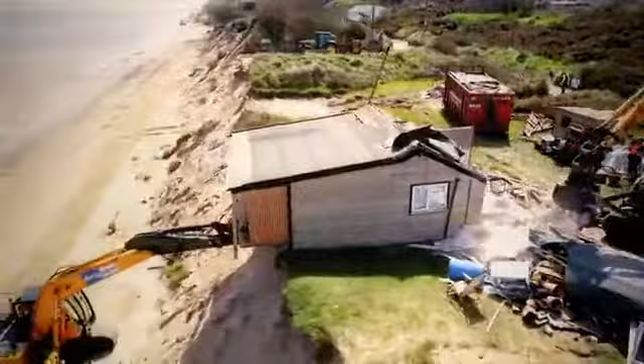With big builds, even the smallest mistake can be a huge disaster. From miscalculations to misunderstandings, these are the engineering catastrophes that only an expert can hope to fix.

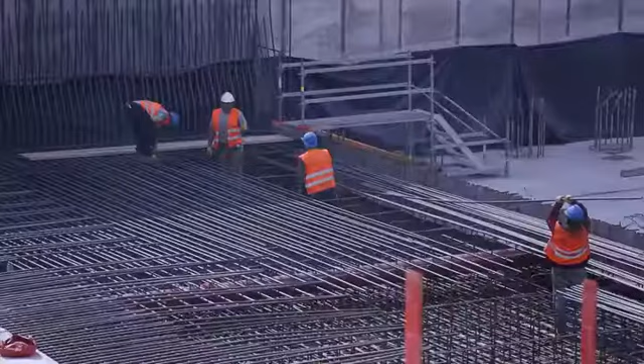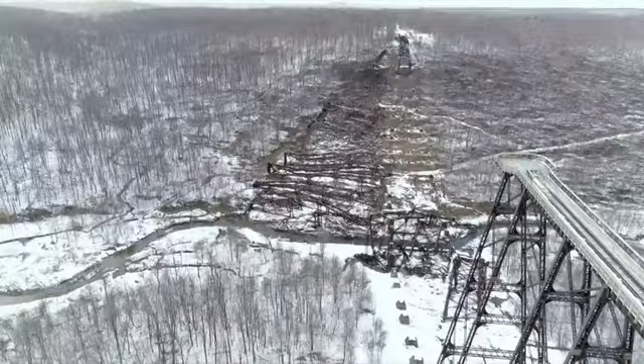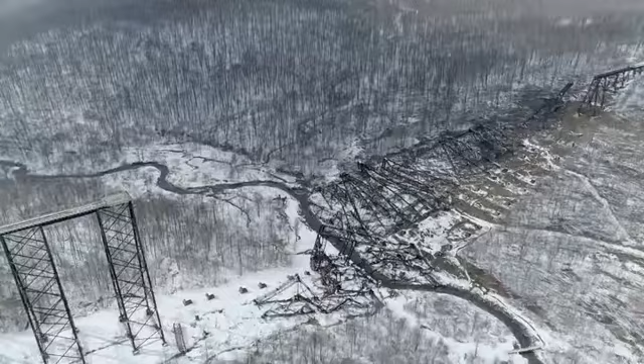When it comes to revolutionary design, sometimes we can learn from the past, other times we can improve on it. But rebuilding on an old foundation can be a huge mistake. For this construction calamity, we head to Pennsylvania, USA, and a famous bridge that fell from grace. This is a massive fail. It's utterly incredible that no one got hurt. If a train was going over it, it doesn't bear thinking about. What was once considered the eighth wonder of the world is now a relic of engineering oversight.

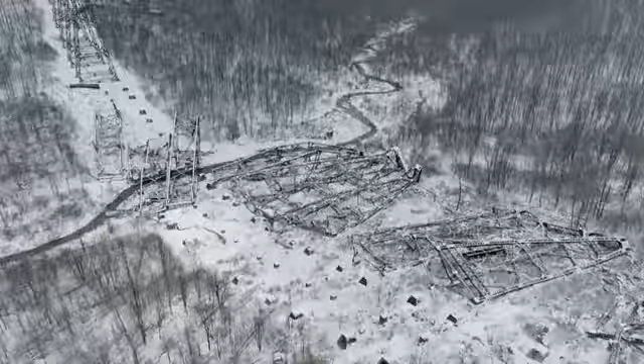The small town of Kinzua, like many other places in Pennsylvania, was central to America's steel production. In the 1880s, demand spiked and trainloads of coal were needed to feed the factories. Railroad engineers faced a giant obstacle, the steep, deep Kinzua Gorge off the foothills of the Appalachian Mountains. The trains had to get through, so they set to work on one of the most ambitious construction projects of the day, the Kinzua Bridge. Completed in 1882, at over 300 feet tall and 2,000 feet long, Kinzua Bridge was the tallest railroad bridge in the world.

At the time, this was pretty much the eighth wonder of the world. It was such an unbelievable achievement. Even with today's technology, this would be a challenge, let alone back in the 1800s. So to actually achieve a viaduct over that size gap was incredible. Jerry Clark from the Bridge Foundation knows what made this build so epic. Other railroads went around the Kinzua Valley. The bridge went across it and used every bit of the engineering technology available during that time.

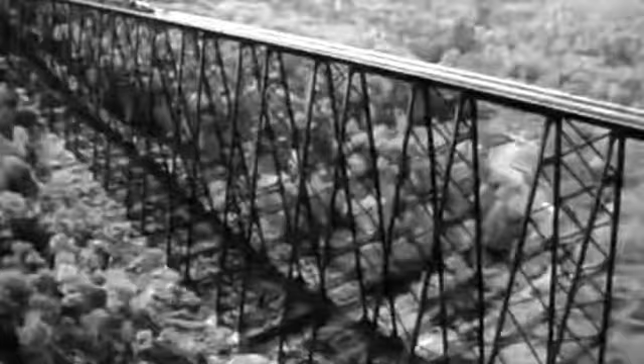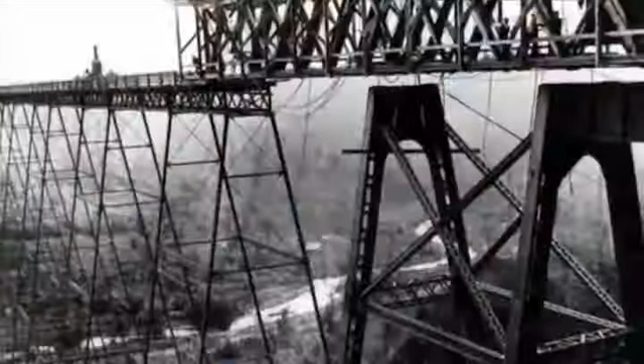To achieve this shorter direct route, the bridge had to be high, long, and capable of supporting heavy coal trains. Engineers ruled out the conventional bridge-making materials, stone and cast iron, instead choosing wrought iron. Building a bridge of this size out of stone or brick would have taken forever, and using cast iron would have been too brittle, so they looked to wrought iron as a suitable material. Wrought iron had another advantage too. It's malleable. So they used sheets of iron to create an innovative support structure known as phoenix columns. These phoenix columns were made out of wrought iron that was folded around and held together with rivets, and this made them stronger and lighter. The revolutionary design was also quicker and cheaper to build.

However, within a decade, locomotives doubled in weight. This meant more strain on the bridge and more vibrations. Vibrations are not a bridge's friend. You expect them up to a point, but here we had a tall, long bridge with trains going over. The trains were getting heavier and heavier. They had to be careful not to push it too far. The material could withstand it to a point, but whatever they did not want that material to crack. To minimize vibrations, trains were forced to cross at just 5 miles an hour. Not the most practical solution in a fast-moving world.

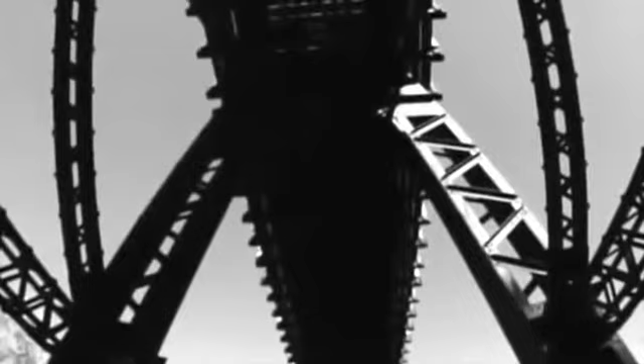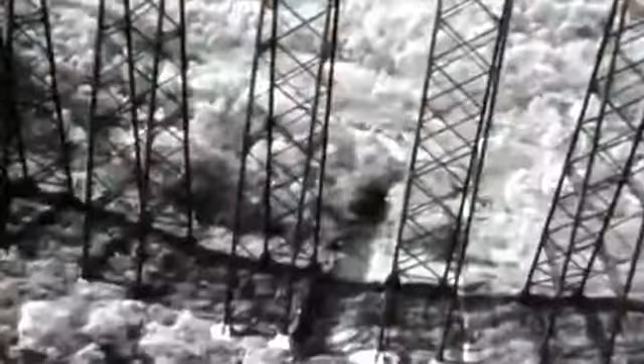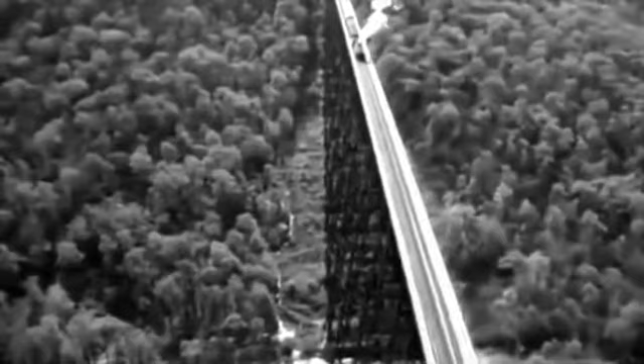Fortunately, an alternative was now readily available: steel. At the time, steel was the strongest, lightest and most flexible bridge-making material around. So it sounds crazy, but they actually ripped the old Kinzua Bridge down and rebuilt it in steel. No bridge meant no coal, so a quick construction was essential. And in just a matter of months, 120 men erected the new bridge. 90 days is all it took to completely rebuild the longest railroad bridge in existence. The new steel bridge used the original trestle design, with large A-frames supporting the pier on top. It could now carry as much coal as the steel mills needed.

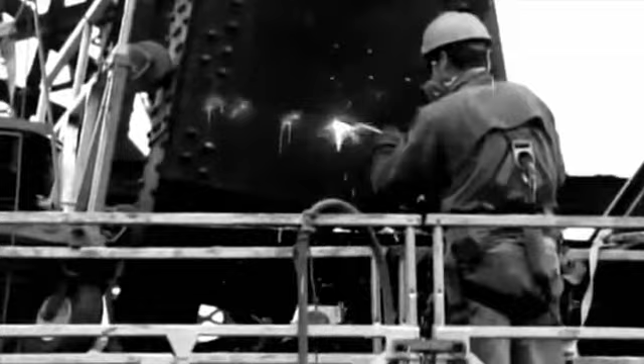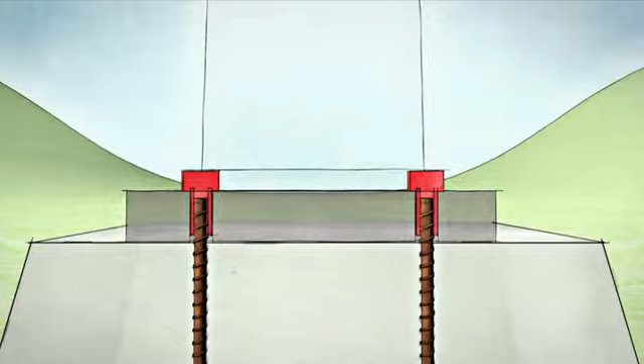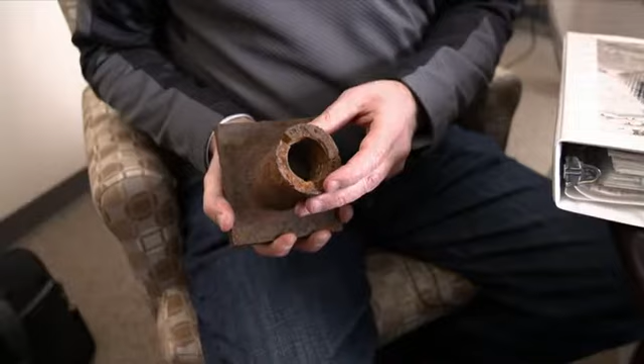But in an effort to save time, a decision was made that would turn out to be disastrous. Rather than installing new steel anchor bolts to hold the bridge in place, the legs were secured to existing bolts. They were too short, so engineers used extending nuts called collars to bridge the gap. So replacing these anchor bolts would have taken forever. You would have needed to dig out, blast away. It would have been a real hassle. So instead, they just put these collars over the top of it. At the time, the collars seemed a reasonable solution, but they hadn't completely factored in Mother Nature.

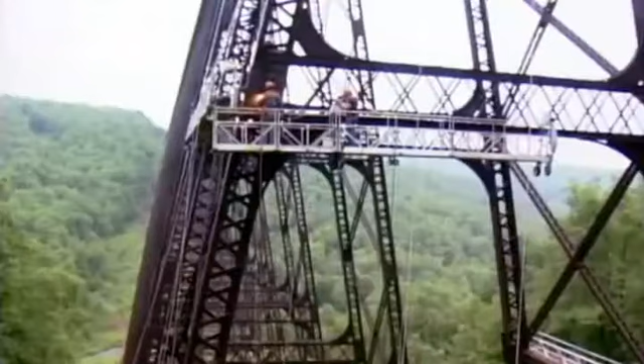This quick fix did the trick, and the bridge carried freight and passenger trains for over a century without incident. In 2002, a maintenance team discovered corrosion on the bridge's legs. They closed the bridge to trains and pedestrians and began repair works. But in the summer of 2003, disaster loomed. An epic tornado spiraled towards the Kinzua Gorge.

In 2003, engineers were repairing corrosion on the Kinzua Bridge in Pennsylvania. But in July, disaster struck when a powerful storm raged up the valley. Structural engineer Brian Emberg was on the restoration team. In July of 2003, I got a phone call, middle of the afternoon, that a tornado had hit the bridge.

I jumped in my vehicle right away, made the trip, and got here right about dusk, and it was clearly a tornado scene, trees everywhere, clouds and mist. I met with the crew and made my way down here to the edge of the ravine, and turned the corner, and the valley just looked filled with smoke like you would expect after a battle.

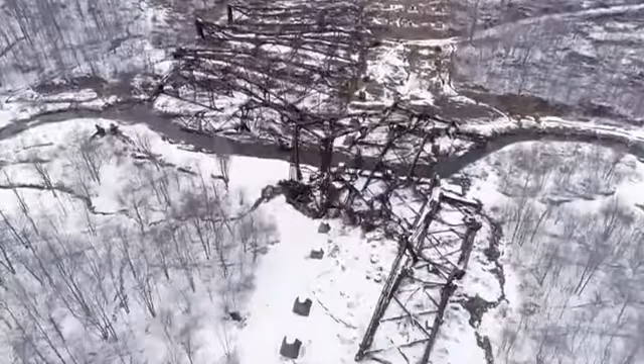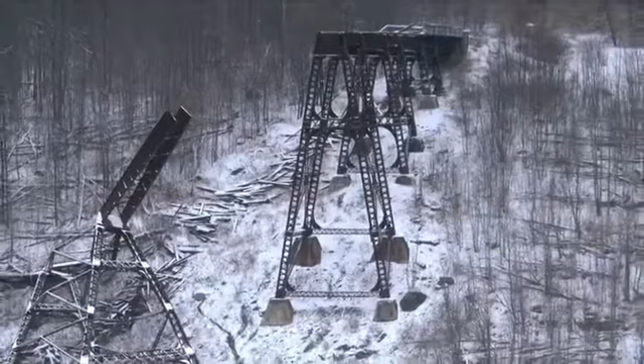You could barely start to make the structure out in the fading light, and you could see pieces of steel emerging from the fog, and then what remained of the structure still standing. It was clear it was a catastrophic failure. The 100-mile-an-hour tornado had sent a huge section of the bridge crashing to the valley floor.

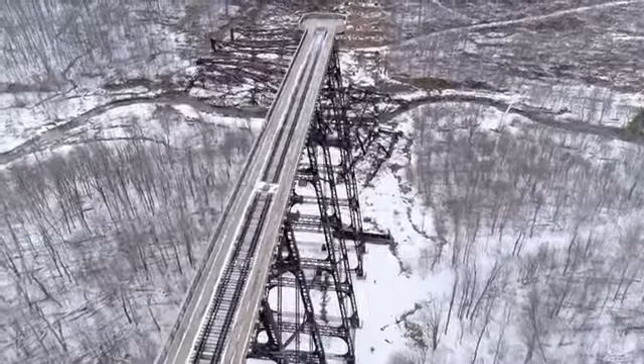This must have been so frustrating. They were on to this problem. They saw it. They were acting on it. So if it struck a few months later, they would have been fine. This is such bad luck. Although devastating to the repair team that spotted the corrosion, closing the bridge had potentially saved hundreds of lives.

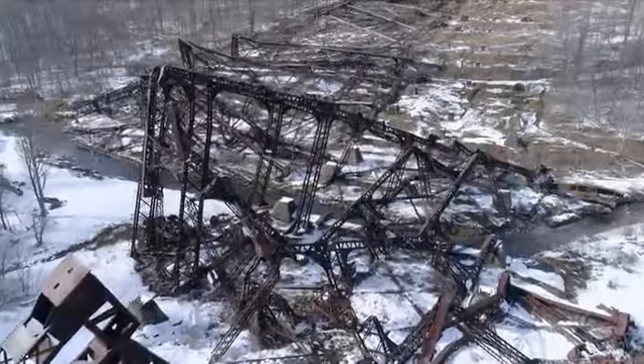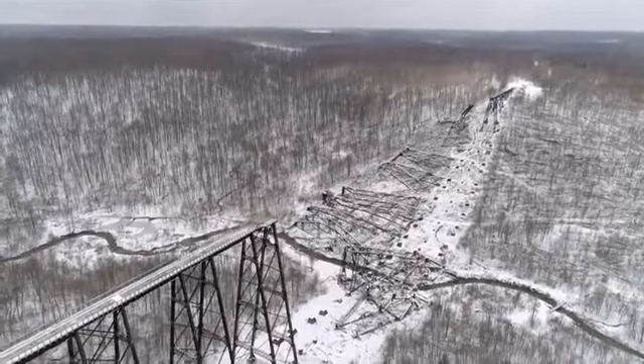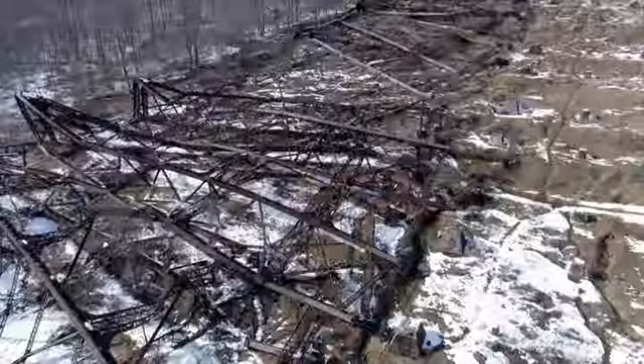To have such a freak of nature storm come in and take it down was really devastating to my crew, my team, and me personally, that we weren't able to get to it and save it in time. Had the tornado arrived a year later, we'd have finished with the repairs and hopefully sustained the structure so it would have survived the storm. The day that it fell down in there, you kind of felt like you lost a family member.

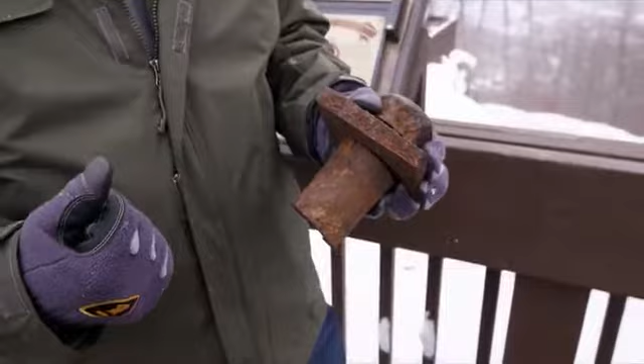Brian and his engineering team suspected the original iron anchor bolts and new steel collars were to blame. And their suspicions were confirmed in the wreckage. So the next morning, I went down to the valley and found these anchor bolts and couplings littering the floor of the valley everywhere, where they had ruptured and failed at almost every single pier.

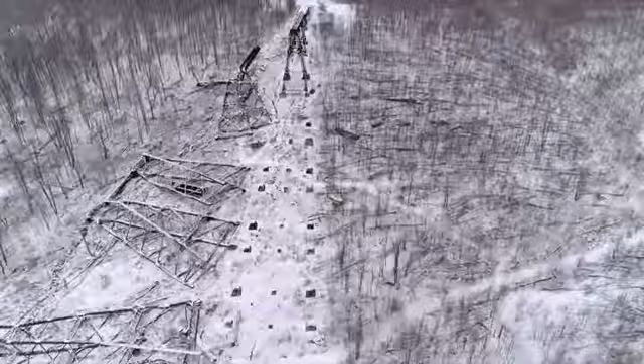Although steel was clearly the stronger and more flexible material, the bridge's iron anchor bolts didn't fail until the tornado of 2003. The problem was that the original designer didn't think there was going to be uplift. And uplift comes from wind blowing on the towers.

When wind blows on the tower, it wants to try and overturn it, and so on this leg, there would be uplift. The original designer used these because he didn't think there would be uplift, when in fact there would be with a 100-mile-an-hour wind. And it turned out to be inferior, especially after years of wear and tear, and it cracked.

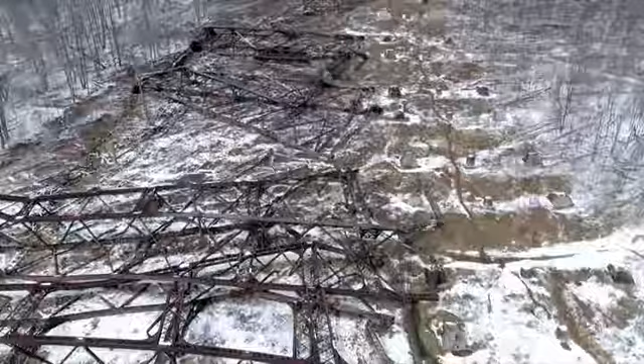A combination of extreme weather and the decision not to replace the anchor bolts over a century ago was the undoing of this epic piece of engineering. This was a hugely ambitious project, and at the time it really pushed the boundaries of engineering knowledge, and it looks like a tiny miscalculation and the use of these collars unfortunately led to the demise of this bridge.

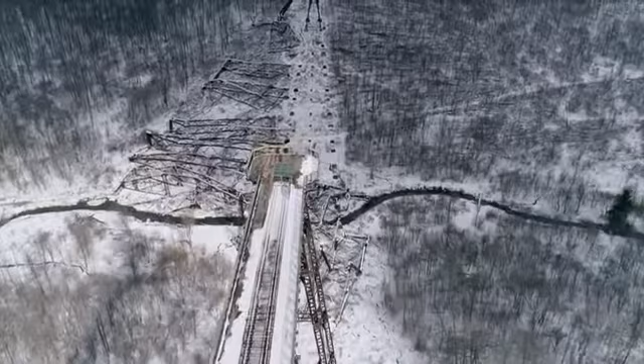Today, around 600 feet of the structure still stands. Rather than tear it down, it was kept as a monument to mankind's ingenuity in engineering. Everything here could have been scrap metal, but there were people that had the foresight to say, this is worth saving. Actually, there are more people that come to the bridge after it was down than when it was up.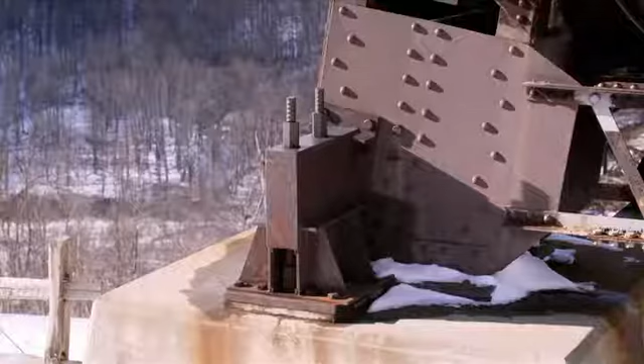To prevent any further collapse, Brian and his team have devised a solution. It's no surprise that it includes steel anchor bolts, an idea that the original engineers overlooked. When it comes to the foundations, you should never cut corners. It may have taken over 100 years, but that lesson was learned in spectacular style.

Next, we head to northern France and a cathedral that's experienced a catalog of catastrophes. This one is a blockbuster of a building blunder. It seems the engineers' zeal to reach the skies clouded their better judgment. This cathedral has been the victim of a combination of tragedy and folly. And when modern-day engineers tried to make a fix, it almost ended in disaster. It's a miracle it's still standing.

Beauvais, a small city in northern France. But there's nothing small about its 800-year-old centerpiece, the gravity-defying Cathedral of Saint-Pierre. So we've got Sagrada Familia, yep, Notre Dame, yep, St. Paul's, but St. Pierre's of Beauvais? Although little known outside of France, the ambition of this cathedral once rivaled any other on Earth.

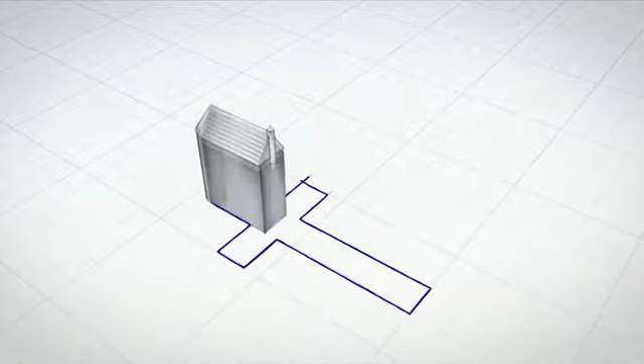Dr. Tom Nixon is an expert in religious architecture. Beauvais Cathedral was begun in the 1220s by an extremely ambitious archbishop, Bishop Milo of Nanteuil, and his vision for this cathedral was really something that would trump all the other major churches in France and the region. Most cathedrals are designed in the shape of a cross, with three main sections: the choir for the clergy, the transept, which forms the arms, and the nave for the congregation.

The nave is often long and grand, but here there was an obstacle. Now, Beauvais could never be particularly long because the site was constricted by the presence of the bishop's palace at the West End. So it could respond to the ambitions of its patrons by being, first of all, very wide, but it could also be very, very tall. And this church, as built, was taller than any Gothic building ever built. And size was very important.

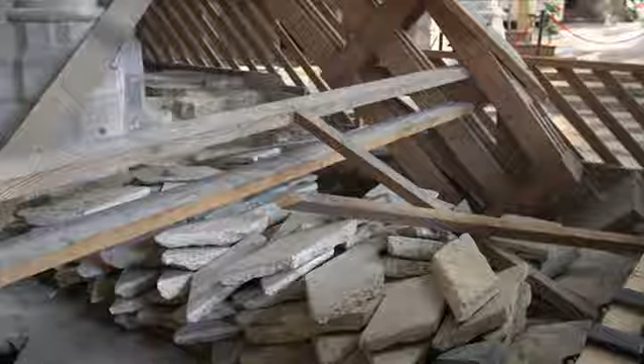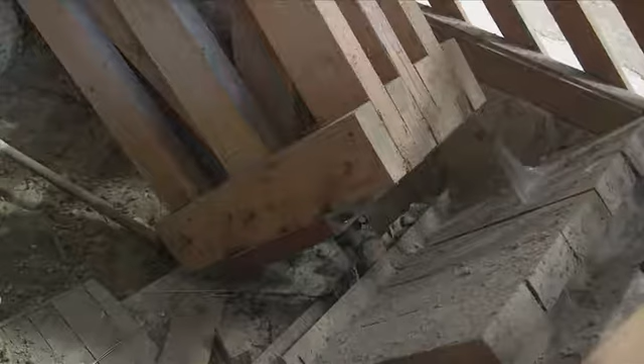With cathedrals, just like stadiums and concert halls, the aim is to have as much space as possible under one roof. But of course, the taller and wider you go, the bigger the engineering challenge. And the greater the chance of making catastrophic mistakes. On close inspection, the grandeur of Saint-Pierre is overshadowed by centuries of repairs that literally hold the building together. And it's all because the original engineers were more focused on height than stability. In fact, their drive for height was so relentless that they had to hold up the tall, unstable walls from the outside.

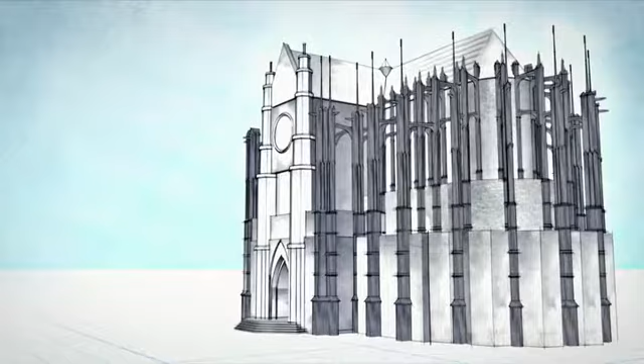So it's really remarkable to be able to come up here to the upper parts of the cathedral. Up here we can really get a sense of the way that this forest of flying buttresses supports the upper levels of the choir. And what's really extraordinary, I think, is many of these piers are still super slender. Flying buttresses act as an exterior skeleton to support the cathedral, but are built to look ornate and elegant, not like mere scaffolding. Engineers hoped these buttresses would be strong enough to prevent collapse.

They're working very hard to ensure that the windows are not obstructed at all, so that we have this wonderful kind of sense of vertical thrust from the cathedral, even though, of course, the reality is the very opposite. What we have is gravity trying to pull this building down. Back in 1284, Saint-Pierre's ongoing battle with gravity came to a head when a fierce storm hit the town of Beauvais. The devastating winds twisted the flying buttresses, forcing them to breaking point. Suddenly, the high vaulted ceiling came crashing down.

Beauvais Cathedral in northern France had ambitions to become the tallest in the world. But in 1284, a storm brought its roof crashing to the ground. The city didn't let that stop progress. The damage was repaired and construction continued. In the 1500s, the cathedral reached dizzying new heights, with the lantern tower soaring over the choir. Jean-Lucien Guénon, one of France's chief architects, explains.

At the time, this was the highest vault in all Christianity at 160 feet high. The lantern tower is built in the Beauvais style, and at nearly 500 feet high, the tallest in the Christian world. The lofty tower was the pride of France, but it had hardly been completed before disaster struck again. This spire was finished in 1570, but cracks appeared straight away, and the whole thing collapsed in 1573 after the Ascension Mass. Fortunately, there were no victims.

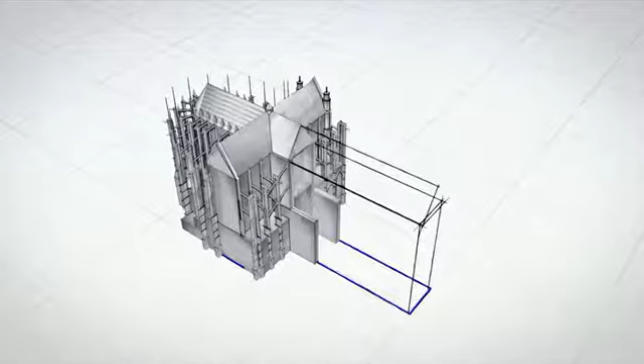Two massive fails before construction was complete wasn't just bad luck. All of the cathedral's problems stem from one major engineering mistake: building too high without enough support from below. In the race to tower over the Amiens Cathedral and Notre Dame, they pushed higher and higher before they had completed the lower floors, which now sounds crazy. Defying centuries of cathedral construction logic, Saint-Pierre's was built with only the start of a key structural element: a nave.

So here we can see the junction of the 10th century cathedral, which originally extended much further to the east, and the new work, the new Gothic church begun in the 1220s, although what we're looking at here is really the transept and the very beginning of the nave, begun in the 16th century. The ancient church didn't provide any support for the massive new cathedral. Leaving the nave unfinished was a fundamental error. The huge weight of the towering walls was pushing them outwards.

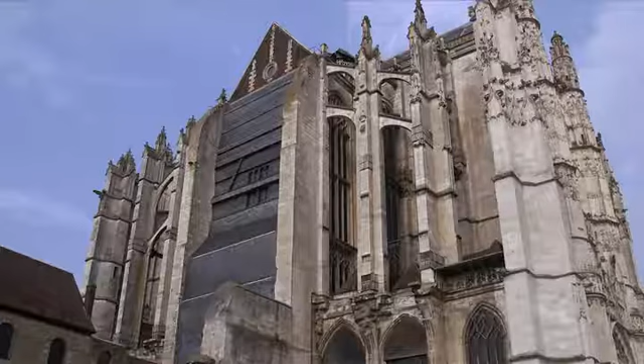They went to all the trouble of digging 10-meter deep foundations, which would have been a huge undertaking, and yet they didn't finish off the nave, which is the essential part to keep the rest of the cathedral standing. Fixing the damage caused by the collapses finally drained cathedral finances, and construction of the nave was put on hold for a few hundred years.

In the 19th century, a few projects wanted to continue building the nave, but it didn't happen. They couldn't find the money. The next works to be carried out were essentially restoration. Although construction remained at a standstill, during the Middle Ages, architects realized the walls were on the brink of collapse. A resourceful fix was needed, and fast.

The builders weren't totally blind. They could see the building was struggling. And to stop it from bowing outwards, they installed iron tie bars. The tie bars literally tied the walls in place, a crude but effective fix that stabilized the cathedral.

Fast forward to the 1960s, and modern-day engineers thought they knew better, with almost catastrophic results. And so it was decided to replace them, but this time not with iron, but with steel tie bars that had less flexibility. And so, whereas the old structure had a certain amount of give and take, it could respond to the winds, the new structure was much more rigid.

By replacing the iron tie bars with steel, a more rigid alternative, the cathedral had lost its flexibility, which left it at the mercy of Mother Nature. So basically, by trying to modernize the fix, the engineers had actually made the cathedral more vulnerable than it had been for centuries.

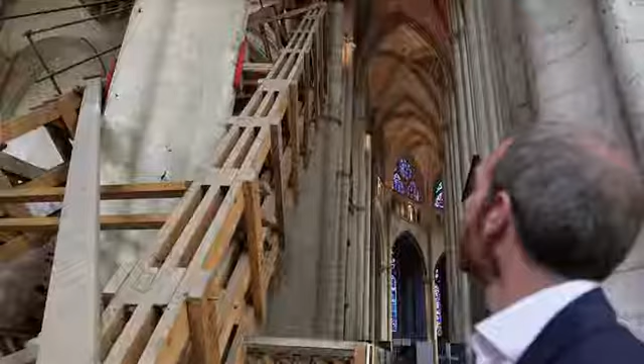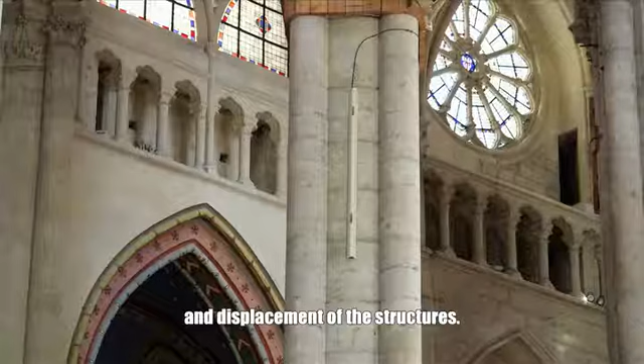With such a fragile piece of architecture, today, engineers keep a watchful eye on any change in the cathedral's stability. Saint-Pierre is closely monitored, using modern technology. Constant Chacoz and his team use highly sensitive sensors to detect the slightest movement. On this pillar, we can see optical strands fixed onto the structure. Optical strands are very accurate sensors dedicated to the measurement of strain and displacement of the structures. The resolution of these sensors is about 1 micron. A micron is 100 times smaller than a hair.

1 micron might seem like a tiny amount, but when you've got thousands of tons of stone shifting around, I'd want to know exactly what was going on. While monitoring for modern-day movement, Guillaume Caron is laser mapping the cathedral in 3D to check for hidden defects in the original construction.

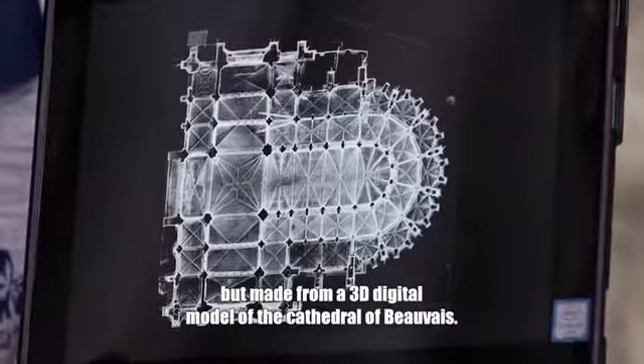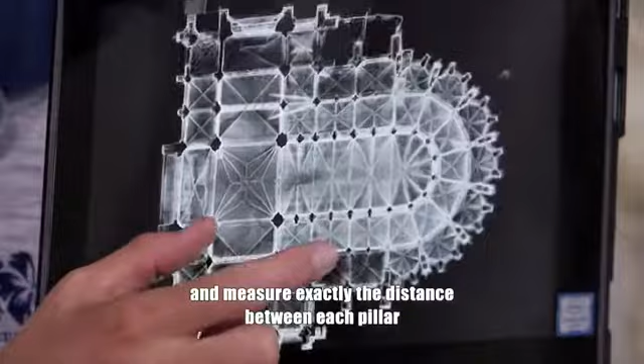This image is a kind of blueprint, but made from a 3D digital model of the Cathedral of Beauvais. And what is interesting from this information is it's not a manual drawing, it's got from measures. So from this blueprint, or digital blueprint, we can highlight some deformations and measure exactly, for instance, the distance between each pillar in the cathedral.

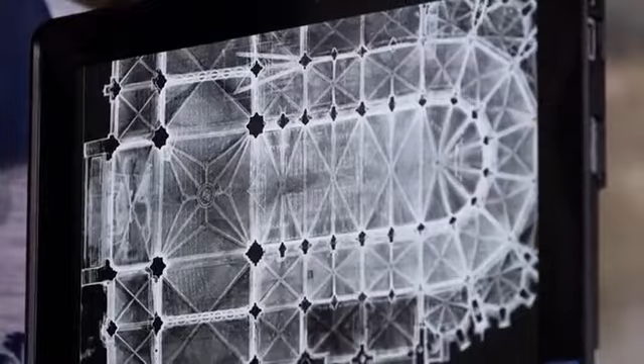Laser scanners bounced high-energy light off every surface in the cathedral, creating a highly detailed picture of the building. It was so detailed, they could see things that weren't visible to the naked eye. What Guillaume's team has discovered is more than a little disturbing. Beauvais Cathedral in France has a history of engineering issues that date back centuries. Today, modern technology is vital to understanding how best to preserve this fragile building.

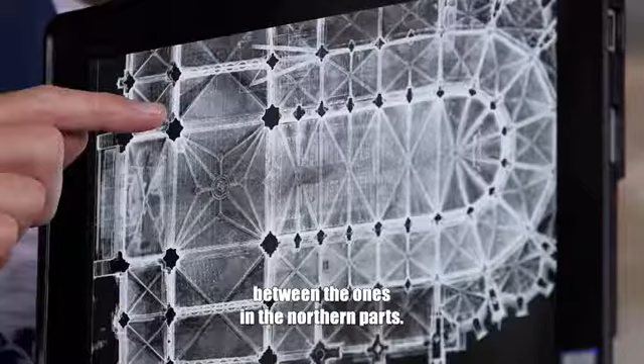Guillaume Caron explains. Using this image, for instance, we are able to highlight that the pillars that are on the southern part of the choir are very nicely aligned, but there are some misalignments between the ones in the northern part. These misalignments have remained undetected throughout the ages, but reveal a whole new instability threat. We were surprised by these deformations and the fact that the building is still not collapsed.

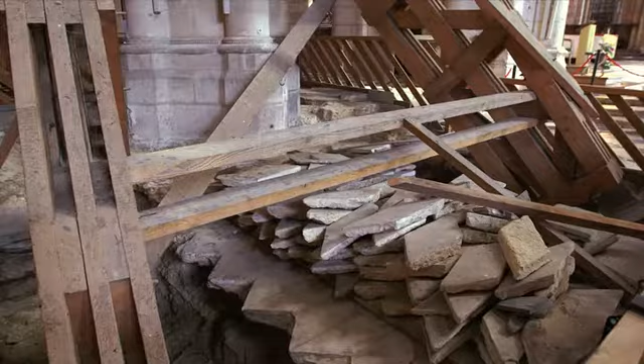To further stabilize the walls, engineers have taken the radical step of installing giant braces. The braces, they're not pretty, but at least the cathedral is still standing. This building is clearly a survivor.

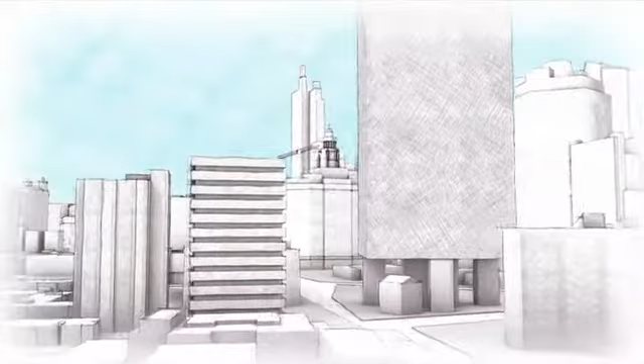Our next story begins in Illinois, where a radical piece of engineering dating from 1900 has inadvertently opened the Great Lakes to invasion. 5 to 10,000 of them just erupting out of the water. I've been struck in the head, one who nailed me right in the thigh. This Army engineering solution is truly shocking.

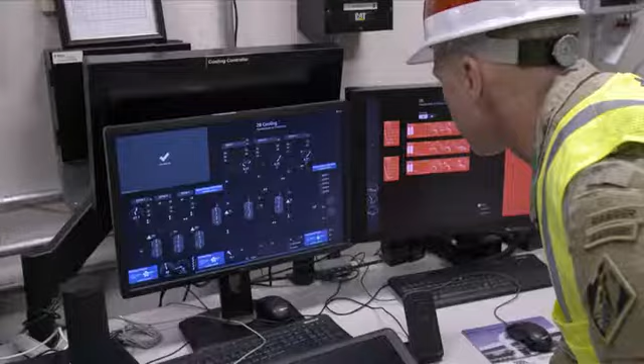Chicago, Illinois. In the 19th century, the Windy City grew from a staging post to one of the most influential places on Earth. Home to hot jazz and deep dish pizza, Chicago is the place to be. And in the summer, there's no place you'd rather be than on the nearby shores of Lake Michigan. Lake Michigan is one of North America's 5 Great Lakes, the largest group of freshwater lakes on the planet.

Jennifer Caddick represents the Alliance for the Great Lakes. The Great Lakes region supports a multi-billion-dollar tourism industry, but there's also a thriving hunting and fishing economy in the Great Lakes region as well. People come from all over the world and all over the states to hunt, fish, and recreate here.

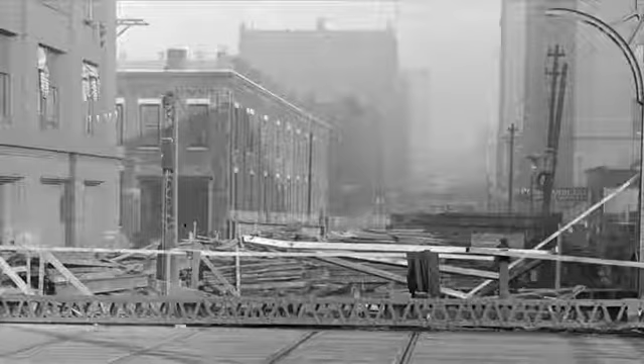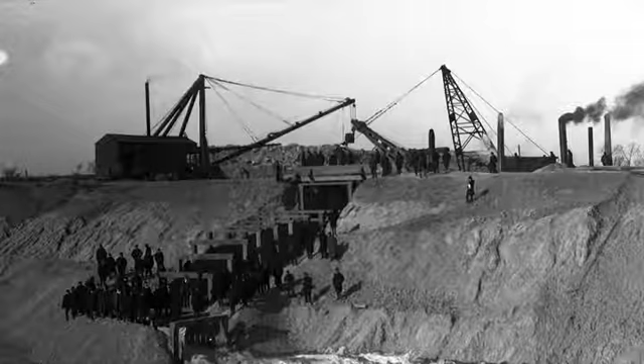By the late 1800s, Chicago's rapid growth posed a problem: more and more sewage. Back in 1900, Chicago had problems that their sewage, all of their waste, were flowing into the Chicago River, and then that was flowing out into Lake Michigan and right towards their drinking water intakes. To stop sewage from contaminating the fresh water of Lake Michigan, engineers came up with an epic idea: to send the city's waste in another direction by reversing the flow of the Chicago River.

Work began on the Chicago Sanitary and Ship Canal, connecting the Chicago River with the Des Plaines River, 28 miles away. The new waterway connected Chicago with the Mississippi Delta and ultimately the Gulf of Mexico, not only solving the sewage problem, but also creating a trade route. However, the ingenious engineers had unknowingly opened up the Great Lakes to a major threat. I'm stating the obvious here, but connecting 2 waterways that have never been joined before sounds like a recipe for disaster. This disaster came in the form of an invasive interloper, the Asian carp.

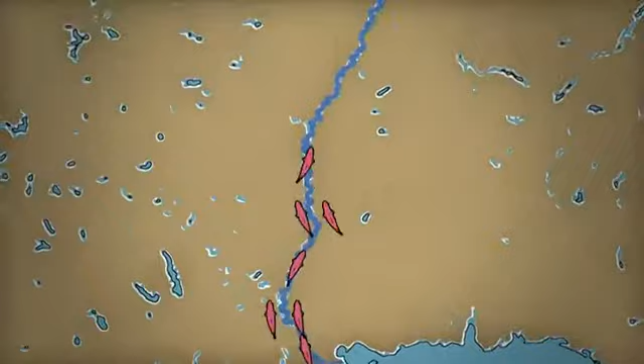Initially, in the 1970s, the Asian carp were brought in intentionally to eat algae in sewer treatment plants. However, they have since escaped via flooding into the surrounding waterways and are now running rampant throughout the Mississippi Delta and right up toward the Great Lakes. Asian carp are a highly invasive species that spawn rapidly. They overwhelm native fish, consuming their food and threatening their very existence. By the 1990s, the carp had spread to the Mississippi Delta. Today, they are within mere miles of Lake Michigan, and they are still on the move.

Asian carp are not only a threat to native fish, but they can also be potentially lethal to humans. They weigh up to 99 pounds, and when startled, they can leap out of the water unexpectedly. With a tourism and leisure industry worth billions of dollars a year, the last thing the Great Lakes need is Asian carp.

To stop the subaqua menace in its tracks, an engineering solution is in place at Romeoville, 30 miles southwest of Chicago. It's an underwater electric fish barrier, operated by the U.S. Army Corps of Engineers. Colonel Reisinger is in charge. We are standing on top of Barrier 2 Alpha. Each barrier unit generates an electrical field reaching across the canal.

As the fish moves from downstream to upstream, they run perpendicular to that electric field generated. When that fish hits that narrow array field, our intent is to create enough voltage potential there that the fish decides it's uncomfortable enough that it just turns around and goes back down river. Romeoville actually has 3 separate electric barriers at intervals along the canal, in the hope that if a carp gets through one, it will be stopped by the next.

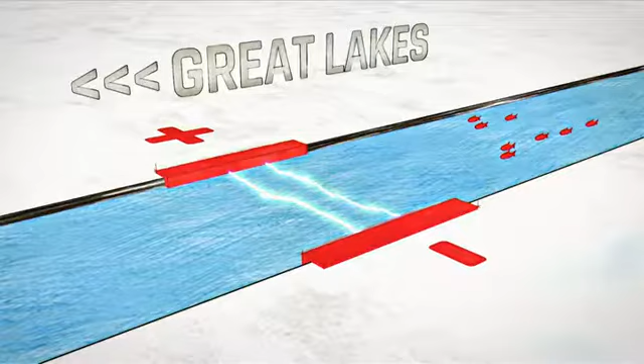The electric fish barriers appeared to be a solid solution. However, recent studies suggest that this piece of engineering isn't watertight. Tests have shown that 62% of fish could get through. The jury's out on this system. It's costing millions of dollars a year, and it might not even work. If the electric field is undisturbed, it's hard for any fish to get through. However, when a big metal boat goes through that field, it breaks up the field, and fish can slide in the bow wake. Also, if fish are in big groups, the outer fish disturb the electric field and the inner ones can slip through.

With invasive fish potentially slipping through the barrier, regular patrols downstream monitor and head off the problem. Expert fish hunter Justin Peterson has his sights set on carp. Today we're looking for small Asian carp. This past summer, we caught a silver carp in a marina that was 5 miles from Lake Michigan. Carp are extremely dangerous. They'll jump into the boat. I've been struck in the head. I had a big bruise on my thigh once from one who nailed me right in the thigh.

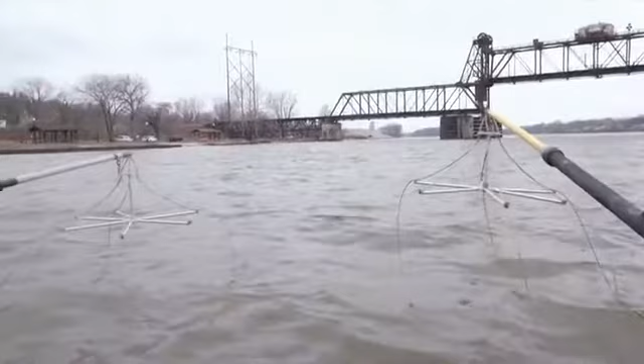Justin's methods are just as shocking as the barriers. Fish get stunned by the electricity. We net them, put them in this tub. Every Asian carp that we catch is weighed and measured. It's a war on carp. I mean, we're at the front lines here, trying to beat them back, and they're trying to keep going forward. At one point, we hit the electricity, and we saw them in the range of 5,000 to 10,000 of them just erupting out of the water.

When you're at war, it's important to know your fishy friend from your fishy foe. This guy here, that's a gizzard shad, quillback, smallmouth buffalo. And this guy here is a silver carp.

All these fish, they're stunned. Within 5 minutes or so, they'll be back to normal, and we'll release them back into the water. Minus the Asian carp, we don't release those ones.

Back in Romeoville, U.S. Army engineers are constructing a fourth barrier in an attempt to strengthen their defenses. Fourth barrier? That tells you all you need to know about the effectiveness of the other three. Some people would say that building the fourth barrier is a waste of money because you're just pushing the problem along.

With the U.S. Army Corps of Engineers desperately trying to stop the advancing fish, experts are looking into other possible solutions. But to truly protect America's Great Lakes, they may have to turn back time. Romeoville, Illinois. The U.S. Army are locked in a conflict with the advancing Asian carp. However, their underwater electric barrier is flawed. Perhaps there is only one real engineering solution that will work.

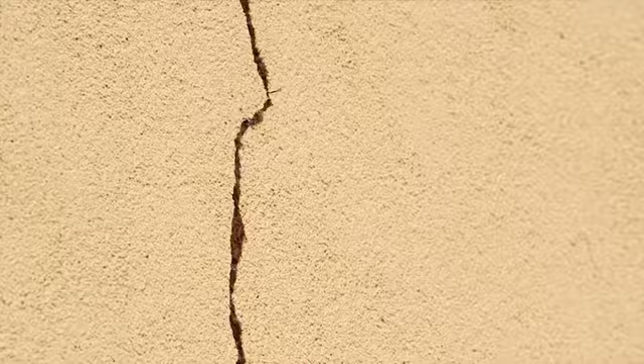What you see here is one of the, I would say, main affected buildings in Staufen. It's right on the Marktplatz, right on the market square. It's an earthquake in slow motion. This is what they say here. The ancient Baroque town hall was worst affected, sinking by 1/3 of an inch. 1/3 of an inch might not sound much, but if your building hasn't moved for 500 years, that's a huge amount. After just 2 weeks, a staggering 68 buildings were showing signs of damage.

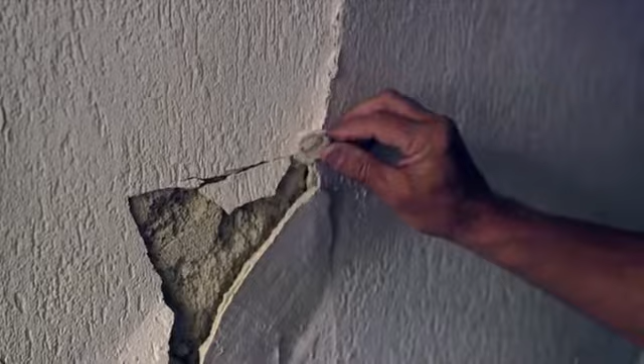And for pharmacist Peter Gasper, there was no cure in sight for this perplexing problem. We detected some cracks in the walls, and nobody was certain what was the reason or the cause of these cracks. Some people got emotional, some people thought about a catastrophe, and so everybody was worried. If you walk through the house, you can find cracks all over the house.

Anxious residents called in geologists who discovered something extraordinary. Staufen hadn't been sinking, but bizarrely, the ground under the town had now begun to rise. The team quickly zeroed in on the culprit, a project to heat Staufen's town hall with a green energy source.

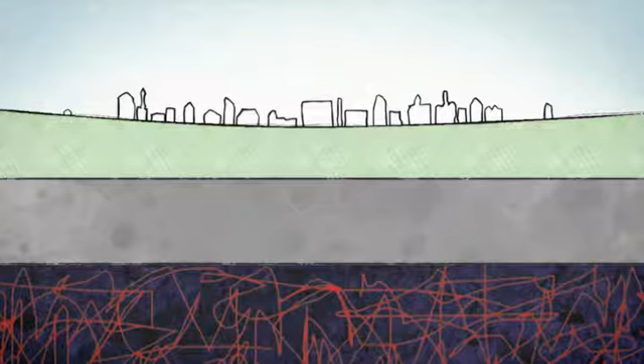The Earth's core is extremely hot and full of geothermal energy. To harness this geothermal energy, you need to drill down straight into the Earth's crust. This heat energy is then drawn up the borehole to the surface, where it powers heating and cooling systems. Drilling began in 2007, just before the town started to crack.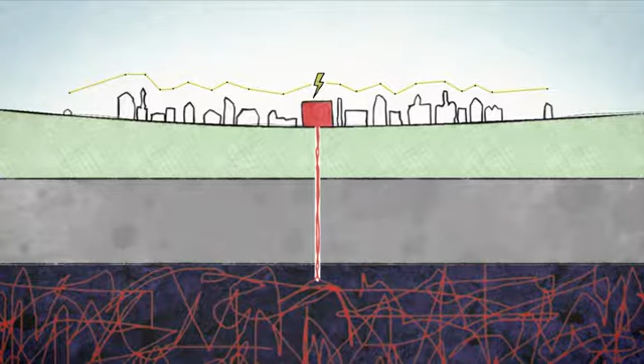When I heard about the idea, when they wanted to repair the building, that they want to use geothermal energy to heat and cool the house, I said, what a good idea. And the town council unanimously said, what a good idea.

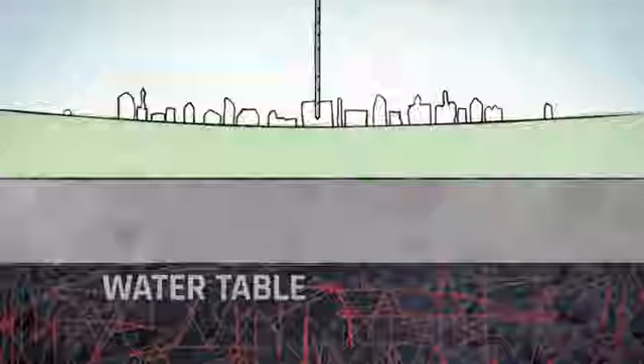Free energy might sound like good news, but to reach the heat, engineers unintentionally triggered a slow-motion earthquake. To tap into this geothermal heat, they drilled a hole about that wide, 6 inches, about 140 meters or 459 feet down into the rock from the surface. There, they reached the water table.

Anywhere on the Earth, if you drill down deep enough, you're going to hit something known as the water table. And this is when water from the surface trickles down and settles at a certain level. That level will differ in height depending on where you are, but it's always going to be there. When they drilled down into the water table, there was an initial drop in pressure, and on the surface, things began to sink. Loss of water explains the ground sinking, but with the town rising, something else had to be going on.

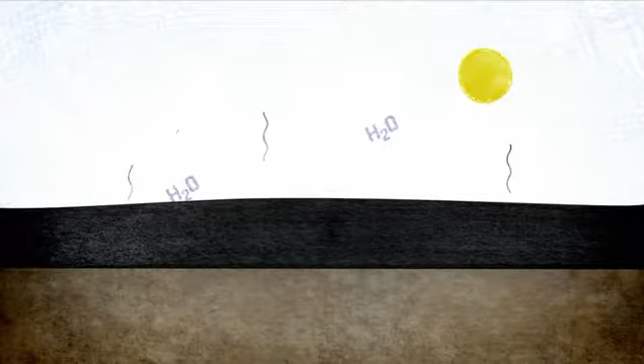In 2007, the German town of Staufen im Breisgau started to crack, causing damage to many historical buildings. When the geologists investigated, they discovered that the town was now rising. Their first mission was to work out what was going on under Staufen. After further investigation, the geologists realized the problem. The town was built on this, anhydrite. Anhydrite was formed millions of years ago by the evaporation of salt water on ancient seabeds.

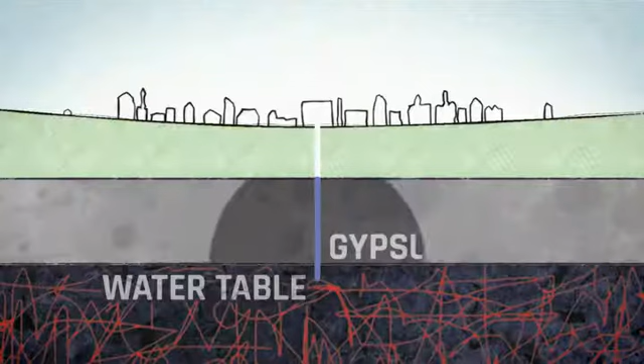Environmental scientist Konstantin Krinja explains. So there's basically just a big layer of anhydrite right underneath Staufen. This commonly occurring mineral rapidly absorbs water. So when anhydrite and water mix, it expands and forms gypsum. The expanding gypsum creates subterranean pressure.

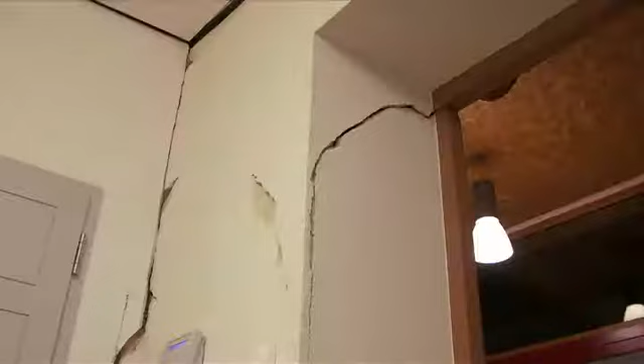Imagine the layer to be something like a sponge, and you pour some water on it so it expands or it bulges up right at the spot where you pour the water on it. And the surface itself bulges the same way. So if you have a house standing on top of it, the floor is basically tearing apart. The geothermal boreholes had brought the anhydrite in direct contact with the water table.

What I have here is a normal diaper. What this diaper has, and basically every diaper has, is superabsorber in it. And this superabsorber is going to act as our anhydrite. And once I pour water over it, it's slowly going to absorb the water. It also increases in volume by quite a bit, and that's the same thing that the ground is doing as well. So this is exactly what's happening underneath Staufen.

More than 10 years on, and the city continues to rise and crack. You've got to understand that this is relentless. Slowly but surely, the ground under Staufen is rising. Parts of Staufen have risen by up to 2 feet, and over 270 buildings are now damaged. So we're now right inside the town hall, and you see the cracks and the uplift, which has done all the damage to this ancient building.

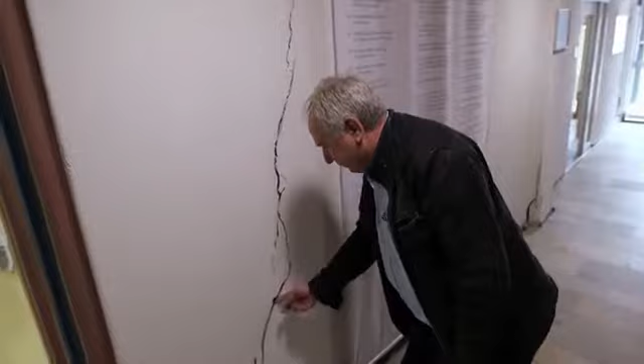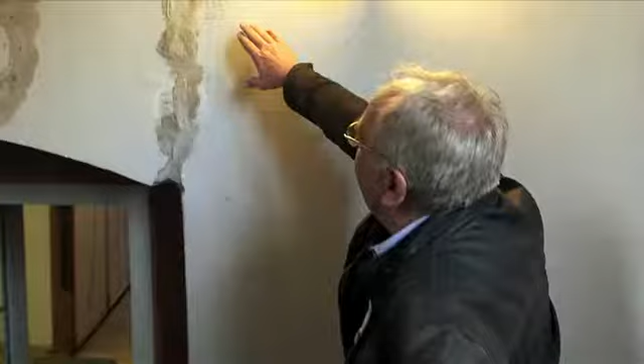Well, this crack, you see, it's one that starts right down in the basement of the building, comes up here, and you see the damage that has been done here to the building. This is a kind of logbook of the cracks, and when people started realizing, you see that they marked the number of centimeters that the building has moved. So we come up here in February, 6.9, in not even 1 month, in 10 days. Then if you add this all together, it comes to 15 or 16, even 17 centimeters.

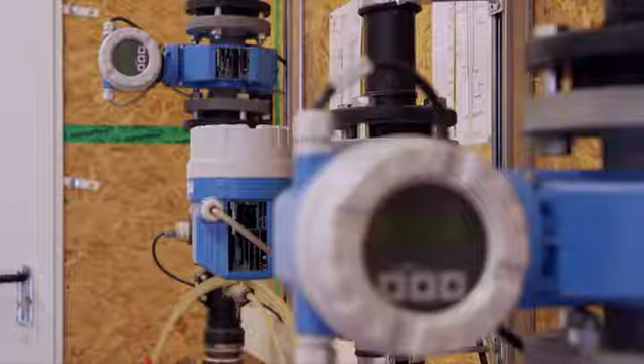With their buildings crumbling around them, the people of Staufen desperately look for a solution to their anhydrite nightmare. With the city in pieces, local authorities are working on a fix. The first stage was to plug the boreholes to prevent water from the surface from adding to the problem. Local geologist Sandra Heisler reveals how the town papered over the cracks. When we discovered that the problem was related to anhydrite, we tried to find a solution. It took 2 years to seal the boreholes again.

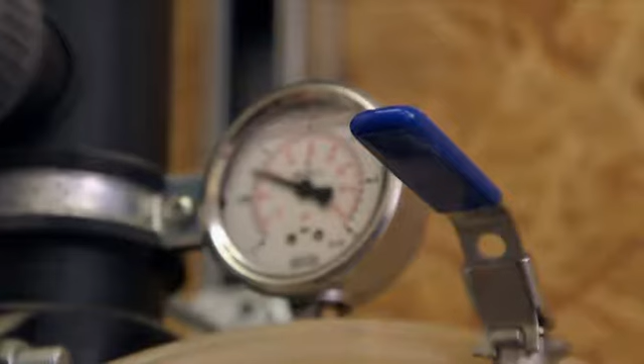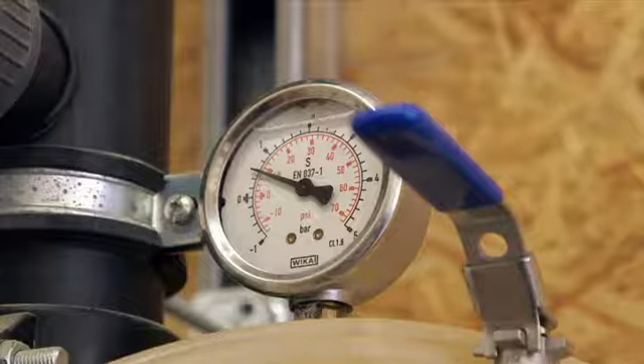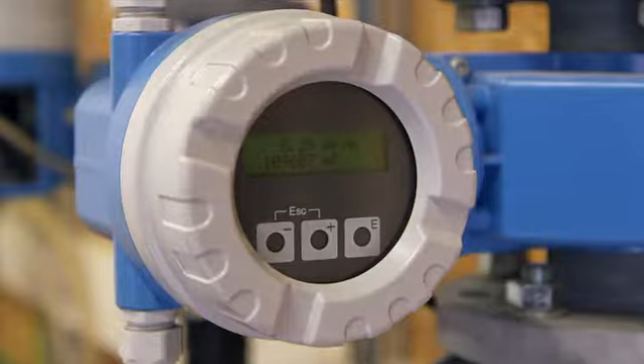But sealing the holes from above was not enough, as the anhydrite is still in contact with the ever-present water table. The pump was installed to draw groundwater up from 460 feet, so that the water level didn't rise any further. By continuously pumping up groundwater, the process is slowed. It has gone down from 10 millimeters a month to 1 to 2 millimeters. It has improved, but it's not over yet. Pumping out the groundwater is helping slow the destruction, but it's not a proper solution. It's like putting a Band-Aid on. But for now, all they can do is keep pumping.

It's impossible to stop the anhydrite from absorbing water. Instead, residents must hope that it will cease naturally in time. There is no time frame. We can't say it'll be okay for another year, another 10 years, another 20 years. There's no certainty. Nobody says so anyway. It's estimated that repairs could cost around $60 million. This is one fairy tale that has truly become a nightmare. I can only imagine how horrible it must be to be living in this town that's literally cracking up around you.